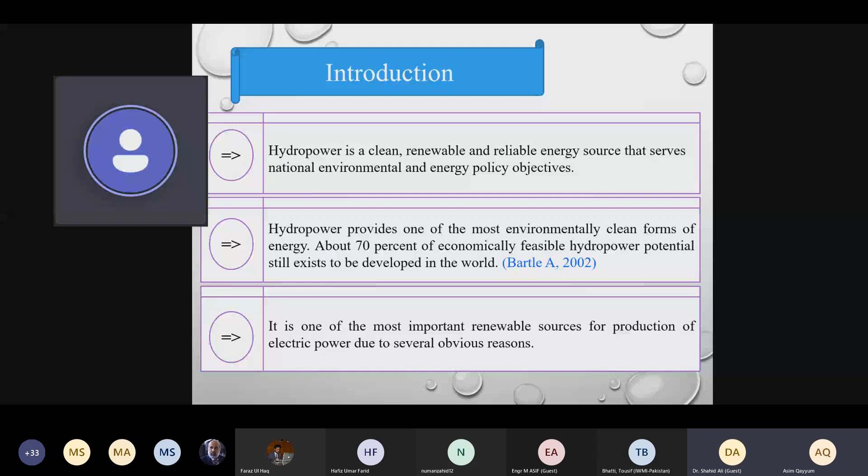First of all, hydropower is a clean, renewable, and reliable energy source that serves as a national and international environmental and energy policy objective. According to Bartle, hydropower provides one of the most environmentally clean forms of energy, and about 70% of economically feasible hydropower potential still exists to be developed in the world. Hydropower is one of the most important renewable sources for the production of electric power due to several obvious reasons.

So why have we selected this research? Pakistan is facing a serious crisis of energy and power production shortfall of about 5,000 to 8,000 megawatt every year. The reasons are underinvestment in the energy sector of Pakistan and partly implemented policies together with structural reforms. So the need of our country is to have cheap and sustainable resources to meet our energy demands. The only best option is hydropower.

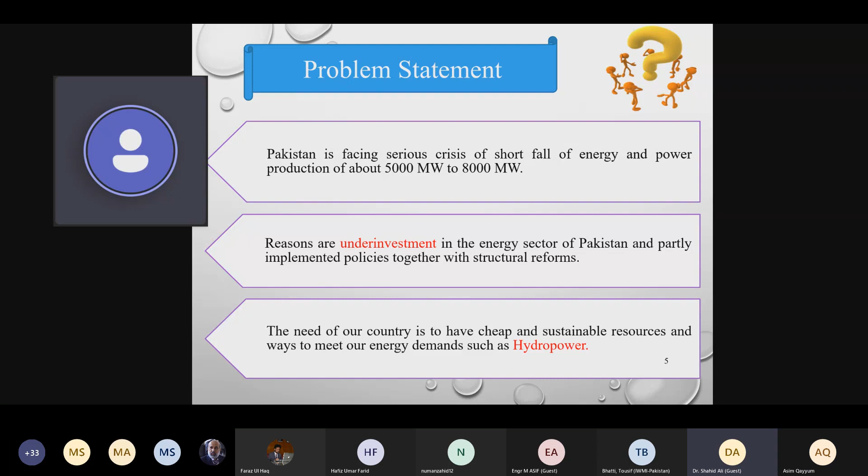The background: on January 4, 2010, in the remote Hunza Valley of northern Pakistan, a massive landslide occurred in the village of Atabad. The landslide dammed the Hunza River and formed an extensive lake at Atabad. At the end of May 2010, the local authorities excavated a spillway to guide the flow through the natural dam. The landslide dam has been stable since 2010 without any external intervention and carries normal flow conditions, and the landslide dam lake transformed into a hydropower source.

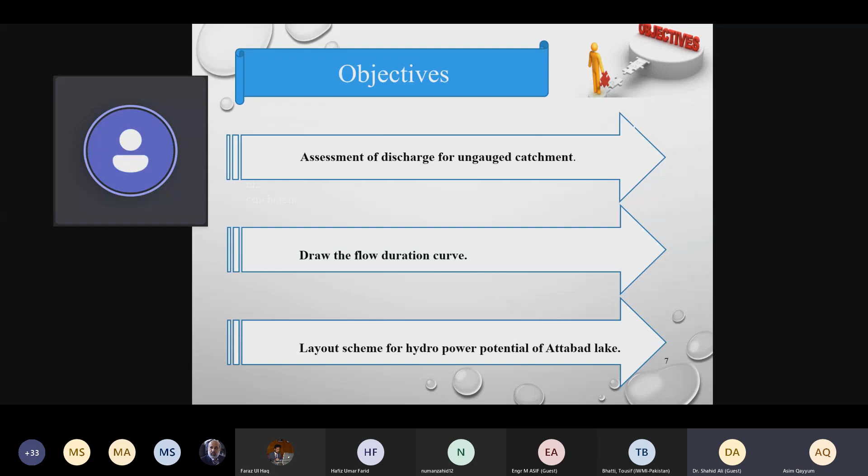Hence, our suggestion is that this natural disaster, if properly analyzed and planned, can be turned into an opportunity. This study has been designed to explore the utilization of Atabad Lake for hydropower purposes. The objectives are the assessment of the discharge, drawing the flow duration curve to see the discharge values, and lastly, by calculating head and discharge, the layout schemes for hydropower potential of Atabad Lake. Due to shortage of time, I am skipping the literature review.

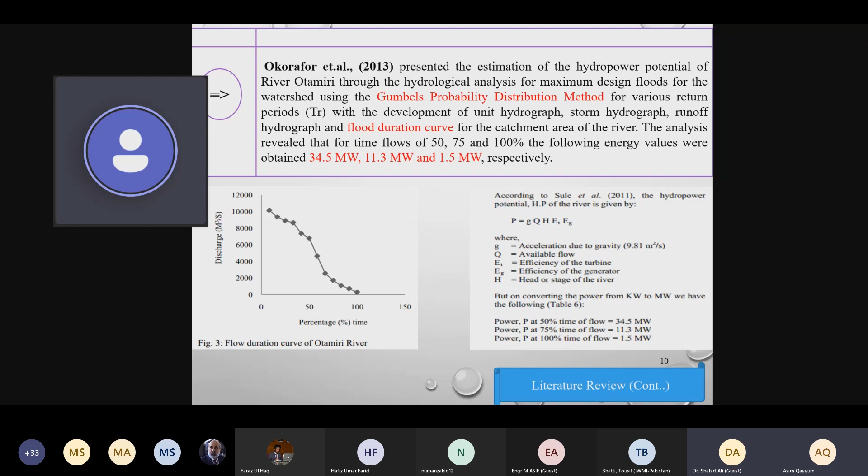Atabad Lake is situated in the northern areas of Pakistan, Gilgit-Baltistan, and the Atabad landslide dam is 30 meters deep, 675 meters long, with about a 60-meter-wide spillway. For the methodology, we required head and discharge data to calculate hydropower potential. We have discharge data from the Surface Water Hydrology Project, WAPDA, at the Daniyor Bridge on the Hunza River. As Atabad Lake is far upstream from the Daniyor Bridge, we have to know the actual discharge at Atabad Lake.

We used watershed delineation and the area ratio method, drew the flow duration curve, and got the discharge exactly at Atabad Lake. Similarly, to calculate head, we used the elevation difference between the intake location and the turbine location. Using the typical equation for hydropower potential, we calculated the hydropower potential and suggested some conclusions that will be discussed later.

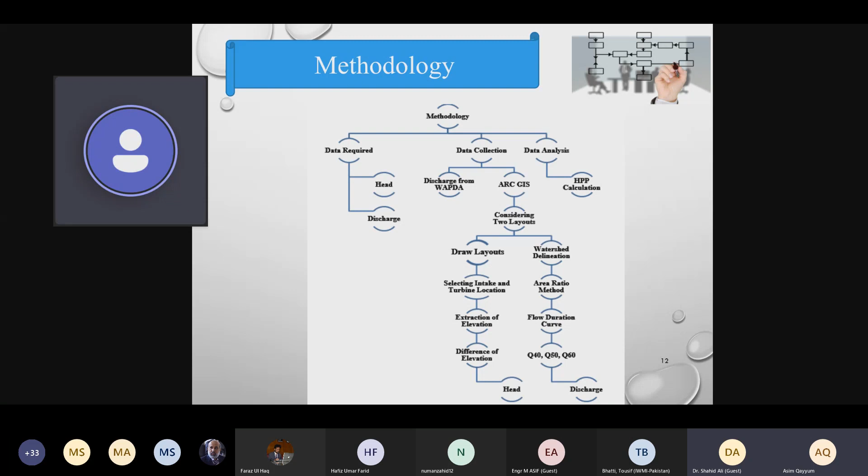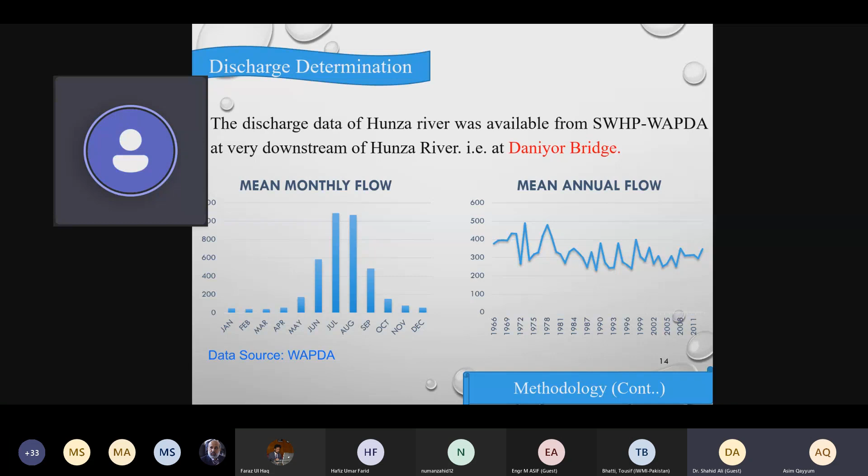In detail, first the discharge determination: as already explained in the methodology, the discharge was available at the Daniyor Bridge from WAPDA, and we calculated our discharge using the area ratio method.

And for that purpose, we use ArcGIS, and we use the extension of ArcHydro tool in ArcGIS to draw the watershed delineation, and then we obtain the watershed area. And by using that watershed area, the already available discharge, and the total area of the Hunza River basin, we calculated the discharge exactly at the location of Atabad Lake.

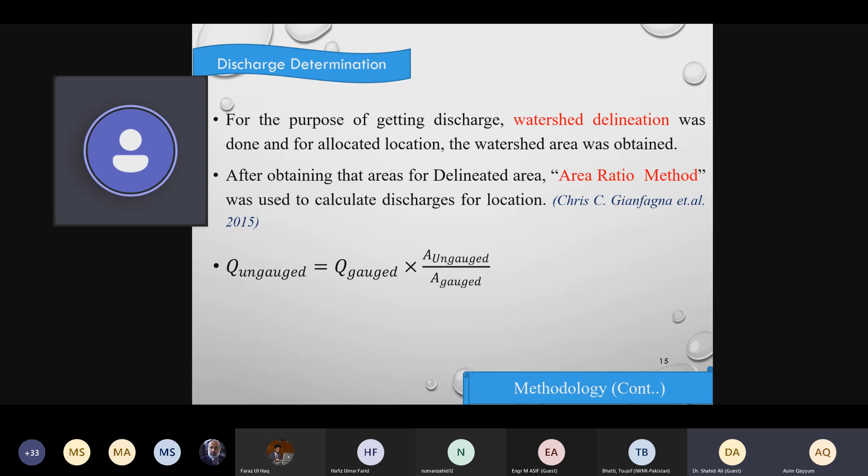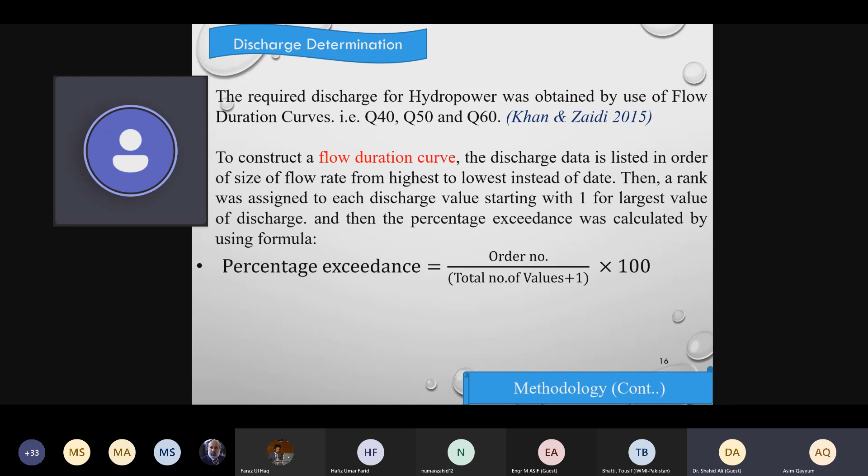So we also drew the flow duration curve, showing how much water will be available throughout the year. So we calculated the flow duration curve, and then we also calculated the head. Head is calculated by the difference of elevation of the dam or weir site and the powerhouse site.

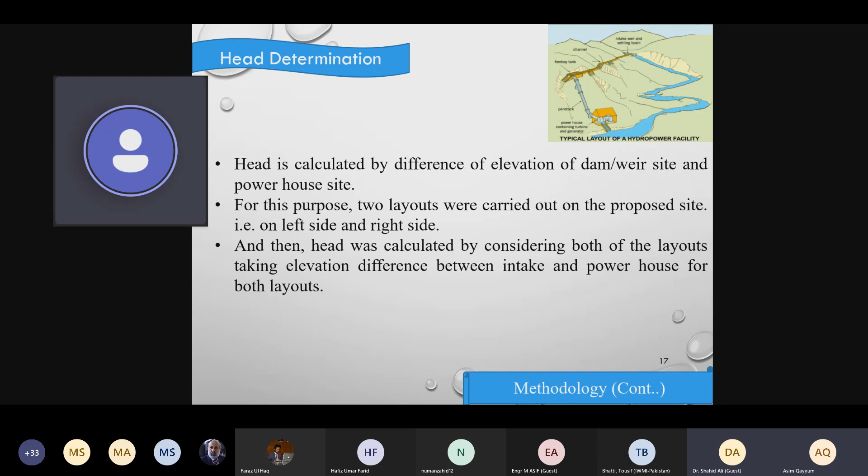So for this purpose, we selected two layouts, one on the left side of the spillway and one on the right side of the spillway. And then head was calculated for both layouts by taking the difference of elevation from the intake and powerhouse. So lastly, we used the typical equation for hydropower potential, and we calculated the hydropower potential at Attabad Lake.

So this is the typical equation that is visible on the screen, in which P denotes the mean annual electric power in kilowatts, and the global efficiency can be 75% to 88%, and we used 81%. The density of water is 1000 kilograms per cubic meter, then the gravitational acceleration, the discharge that we calculated using watershed delineation, and the head that was calculated by the elevation difference.

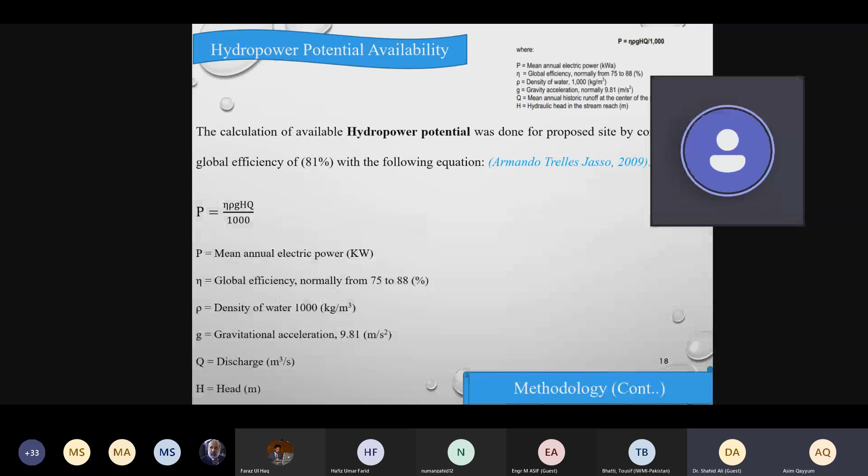So if we talk about the results, these are the results. You can see that we have drawn the watershed delineation using ArcGIS, and after watershed delineation, the watershed area was 8722 square kilometers. So we used this area in the area ratio method and calculated the discharge.

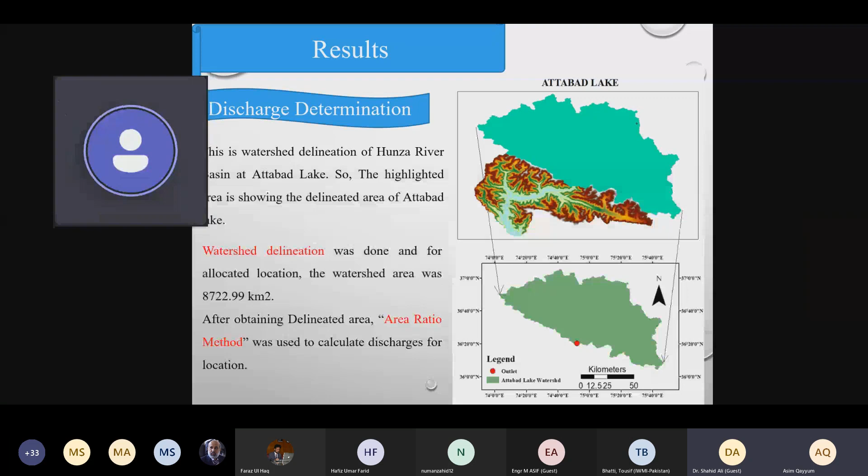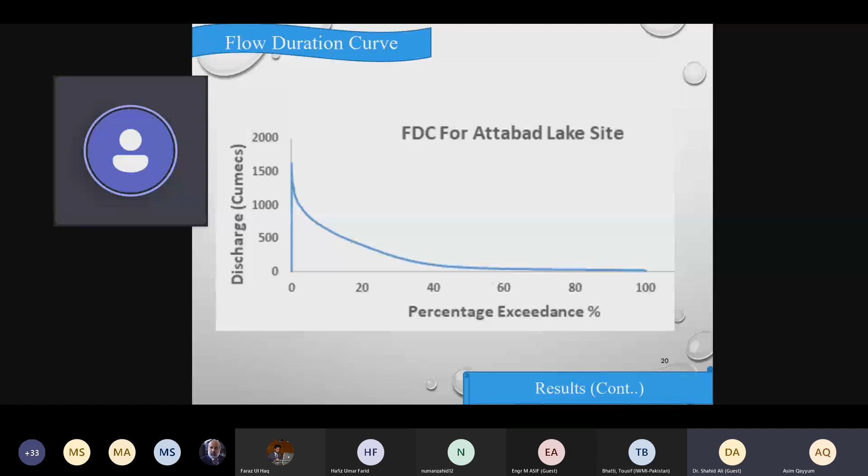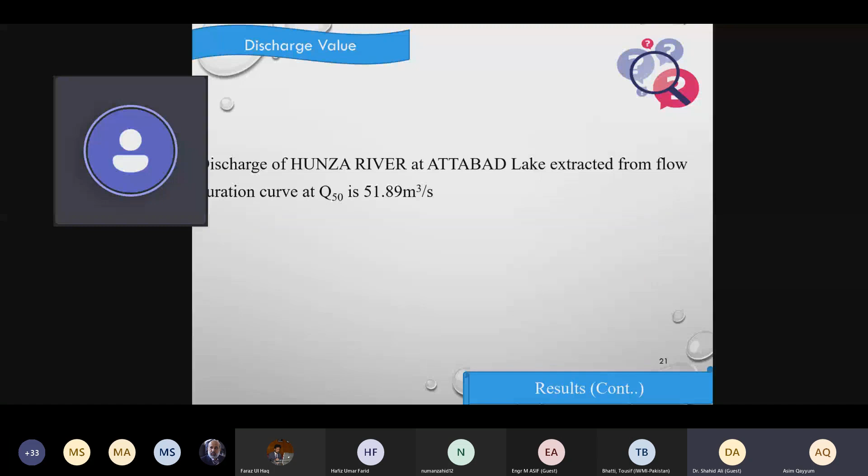After calculating the discharge for more than 60 years of daily data, we drew the flow duration curve for the Attabad Lake site. And it was observed that the discharge of Hunza River at Attabad Lake extracted from the flow duration curve at Q50 is 51.89 cumecs.

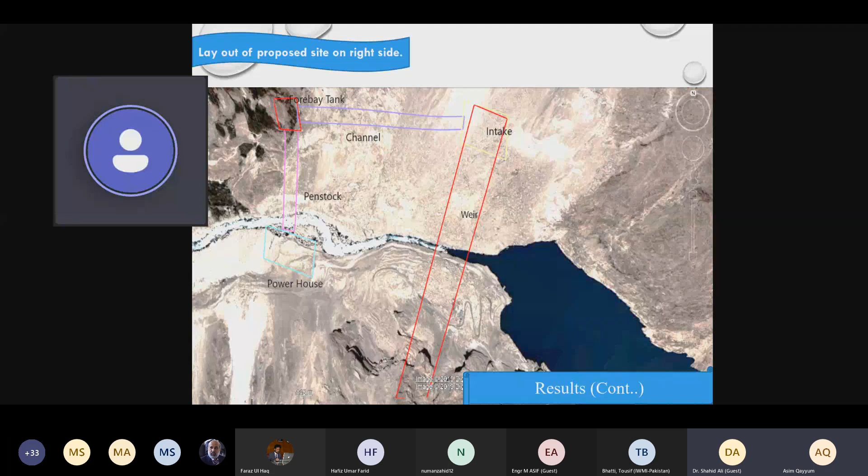So for the calculation of head, we have drawn two layouts. One layout is on the left bank of the spillway, and one is on the right side of the spillway or intake. We used different parameters to calculate the head, and it was observed that the head on the left layout was 249 meters, and the head on the right layout was 231 meters.

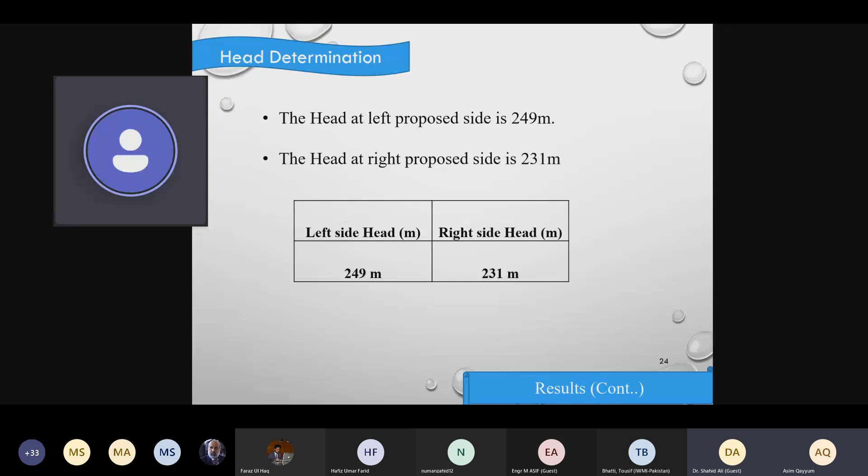So we used the two heads for the left and right sides, and the same discharge of 51.895 cumecs to calculate the hydropower potential, using a global efficiency of 81%. The power generation using the left layout is 102.678 megawatts, and using the right layout, the power generation is 95.255 megawatts.

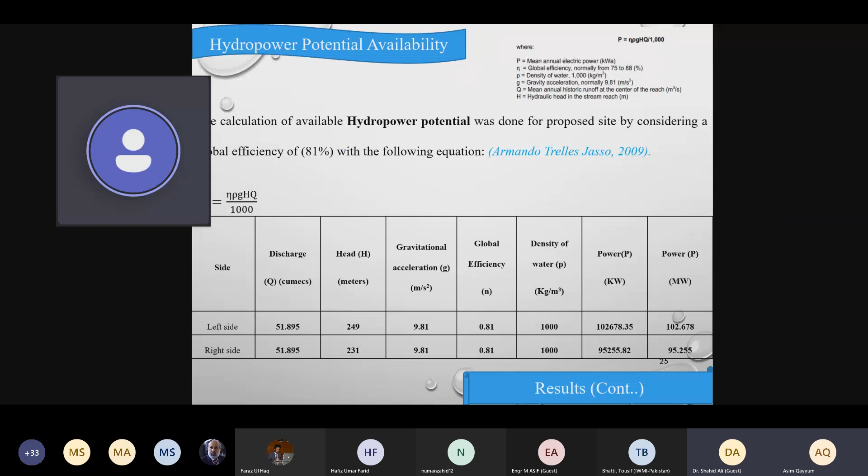So if we talk about the conclusions, as we all know, the utilization of energy sources, especially renewable energy sources like hydropower, is helping reduce Pakistan's dependency on fossil fuels for power generation. Hydropower is a cheap and sustainable energy resource.

As we already discussed in the problem statement, this is actually a disaster, but this disaster, if properly planned and executed, can be turned into an opportunity to generate hydropower potential up to 102 megawatts per year.

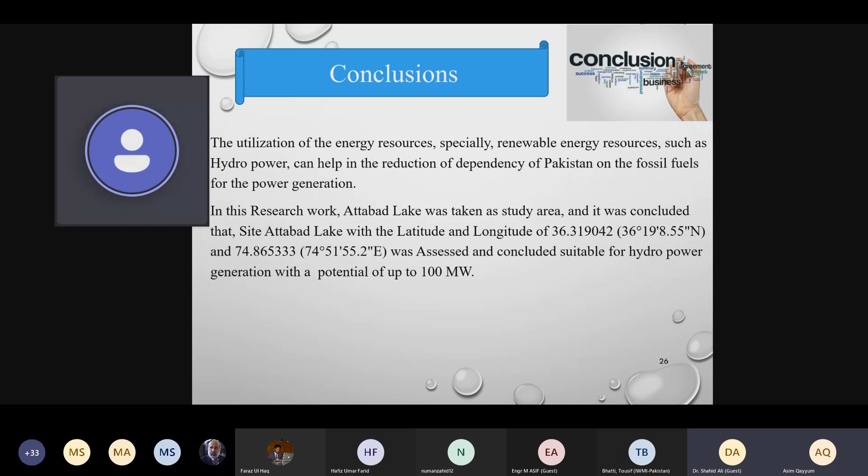In this research work, Attabad Lake was taken as the study area, and Attabad Lake, with longitude and latitude of 74 and 36, was assessed and concluded suitable for hydropower generation with a potential of up to 100 megawatts. The tectonic and geological surveys are not included in it, so they can be carried out at national level, as these studies are also necessary for executing hydropower generation.